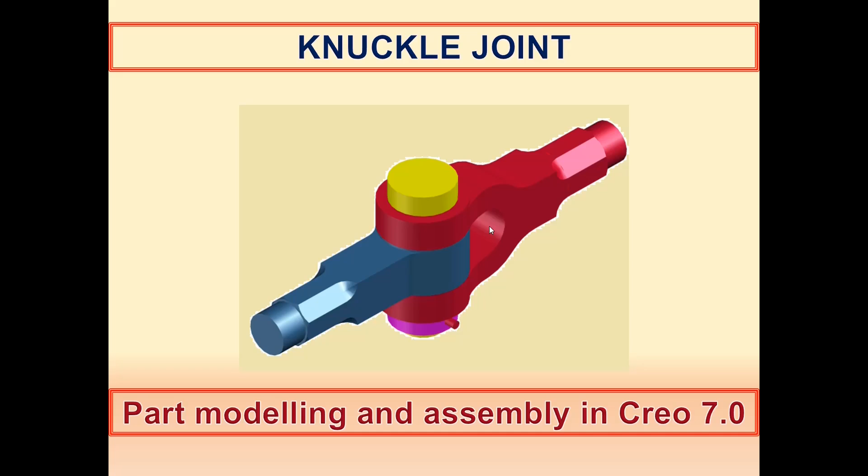Hello friends, in this video I am going to explain the part modeling and assembly of a knuckle joint using Creo 7.0. Now let's see the construction of a knuckle joint.

In a knuckle joint, one end of the rods is converted into a fork end with double eyes and the other end is converted into an eye end with single eye. The eye end of the rod is inserted into the fork end and a cylindrical pin will be introduced through the aligned holes. The cylindrical pin is held in its position with the help of a collar and a taper pin. Here we can see the exploded view of a knuckle joint.

We need to assemble all the 5 parts together to get the assembly of a knuckle joint. We all know that cotter joints are used for connecting two rods with perfect axial alignment, and a cotter joint does not permit any relative angular play between the two rods. But a knuckle joint can be used for connecting two rods having intersecting axes, and we can use a knuckle joint while converting a reciprocating motion into rotary motion and vice versa.

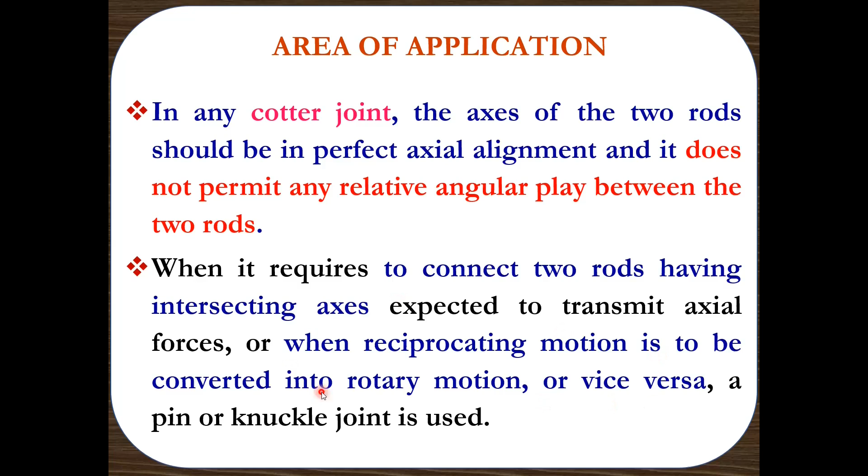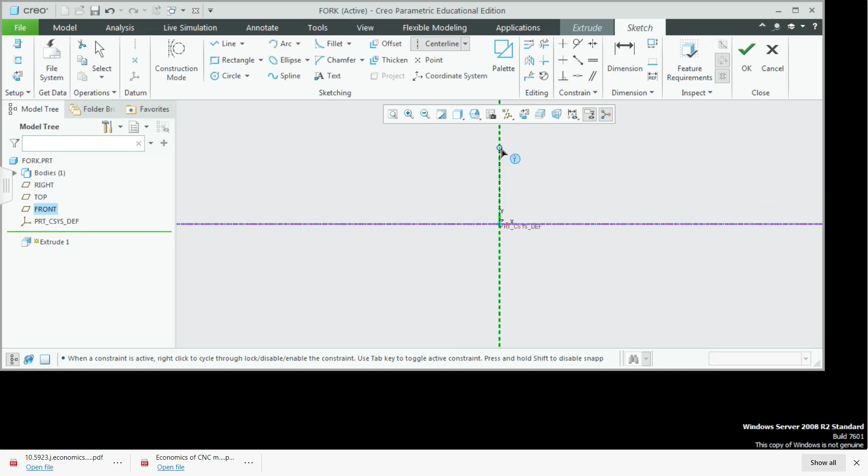Select millimeter Newton second part solid absolute. Give OK. Select extrude option. Select the front plane. Select the sketch view. Now we shall draw the center lines. We shall start with the arc of radius R18. So instead of drawing the arc, let's draw a circle of radius 18. So go to circle command, select center and point, draw a circle. Next we need to draw the arc of radius 36. We shall draw that arc as a circle.

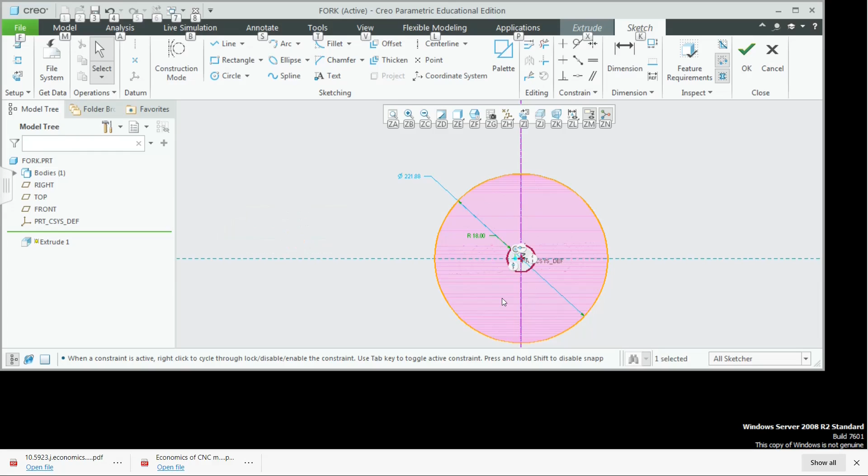Now we shall change the dimensions of the concentric circles. The inner radius is 18. First we shall change the diameter option into a radius option. It is 18 mm radius, enter. And the outer circle radius is 36. We shall change this diameter symbol into radius symbol by left clicking and selecting the radius option. Change the dimension into 36. Go to refit. Now we have completed the concentric circles with radius 18 and 36.

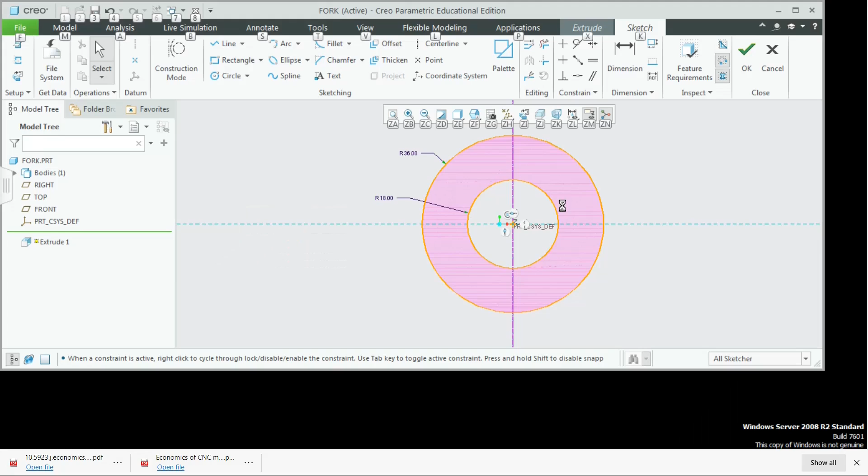Now we have to extend this portion as a square end with dimension 36 by 36. So go to rectangle, select corner rectangle. Okay, now we have to change the dimension. The thickness of the square end is 36. So we can change it as 36. The distance between the center of the arc and the end of the octagonal end is 109 mm. But now we need not consider the 45 mm octagonal end.

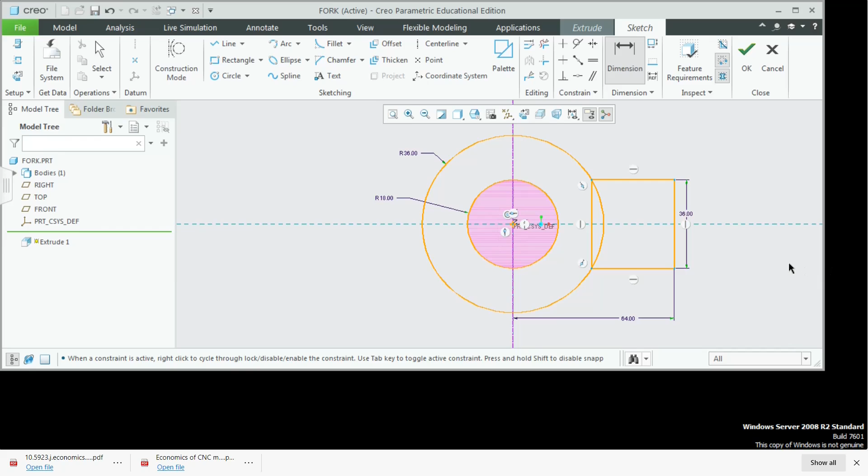Now we shall dimension the distance between the vertical center line and the starting part of the octagonal end. We all know that the distance given is 109, but now we need not consider the 45 mm. So this length will be 109 minus 45. Enter. So it is 64. Now we shall trim the unwanted portion with the help of delete segment.

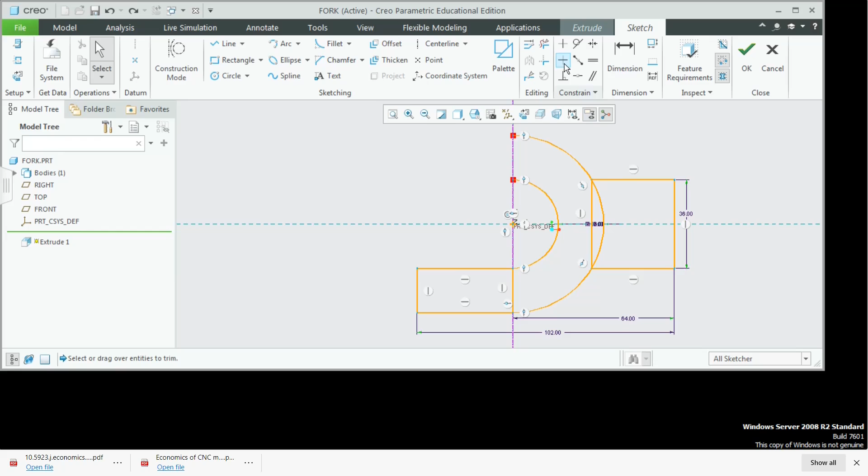Let me draw a rectangle using the corner rectangle option. Select. Click. Now let's dimension this portion, that is from this left end to the starting part of the octagonal end. Since we are not considering this 45 mm portion now, we shall take this dimension as 147 minus 45. Enter. So this length is 102 mm. We shall also remove the unwanted region using delete segment option.

Now let's mirror the lower part with respect to the horizontal center line. Select the lower part, go to mirror command, mirror it with respect to the horizontal center line. From this diagram we can see that the inner radius of the arc is 18 mm and the outer radius of the arc is 36, and the length between the center of the arc to the start end of the octagonal end is 64, and the distance between the end of the rectangular portion to the start end of the octagonal end is 102 mm.

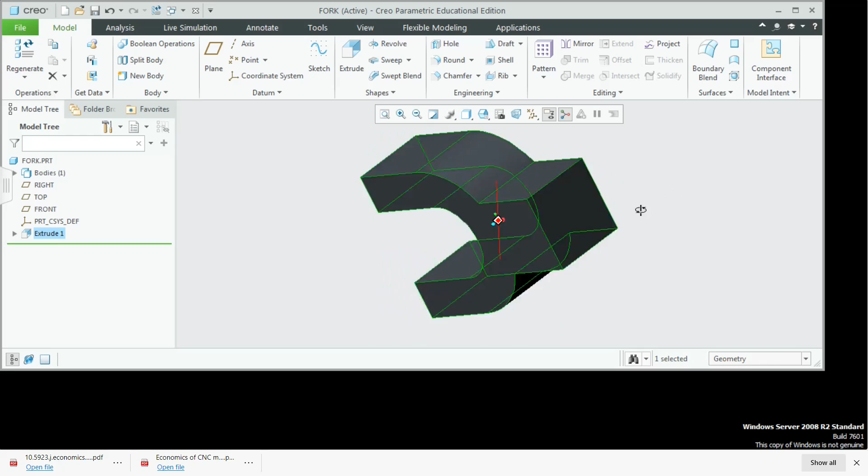Give OK. Now let's slightly tilt it. The total thickness of extrusion is 36 mm. So let's change it to 36, and we need to select the extrude symmetrically on both sides. Give OK. Now we have partially completed the fork end. Select the standard orientation. Now we need to draw the double eyes. Let's go for the next extrude command. Select the top surface. Go to sketch view. Include references.

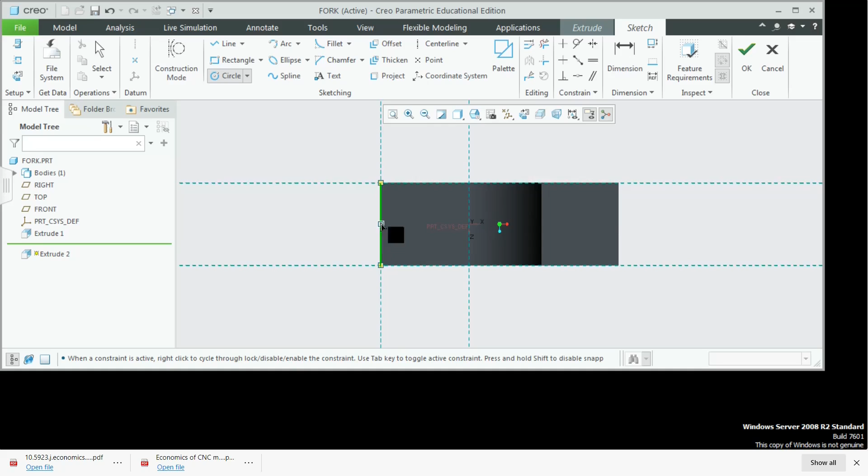Close it. Now we have to draw the two concentric circles on the lower end. The inner circle is of diameter 30 and the outer circle is of diameter 60. Go to circle command, select the center and point option, draw the inner circle and draw the outer circle concentric with the inner circle. Now let's change the dimension.

We know that the inner circle diameter is 30 and the outer circle diameter is 60. Now we have drawn the concentric circles on the upper surface of the lower arm of the fork. Now let's give OK. We need to extrude in the downward direction. Change the direction, and the height of extrusion is 22. So change it into 22.

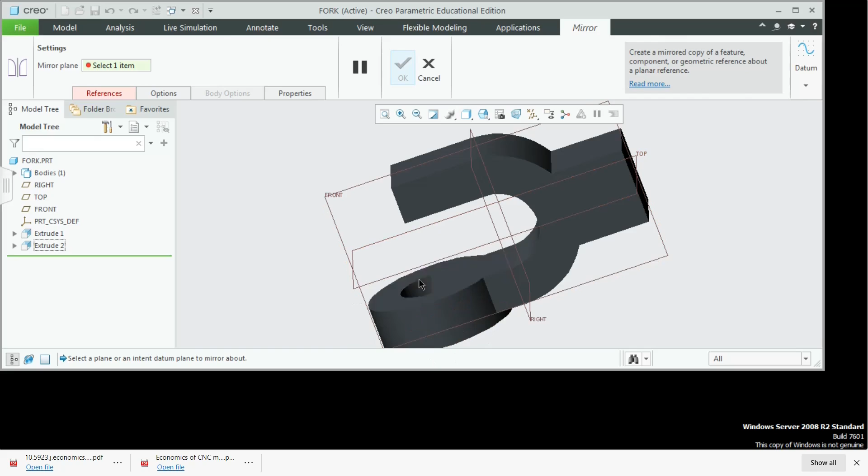Give OK. Now go to view option. Switch on the reference planes. Now let's select the eye end. Go to mirror. We shall mirror this eye portion with respect to the middle plane. Select the middle plane. Now we have created the eye portion on the upper arm of the fork. Give OK. Go to standard orientation.

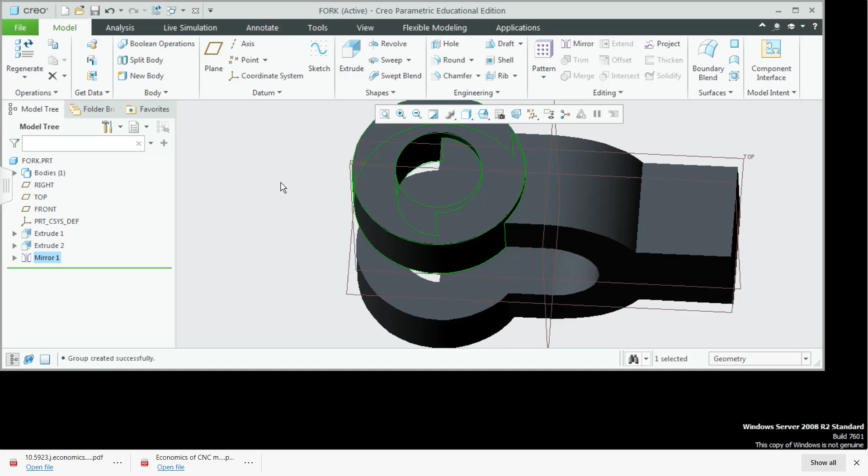Now we have to remove the extra materials which are inside the eye portion. So select the extrude option. Select the top surface. Go to sketch view. Select the references. Give close. Now select the circle with center and point. Draw a circle with the same center. We have drawn a circle at the top end of the eye.

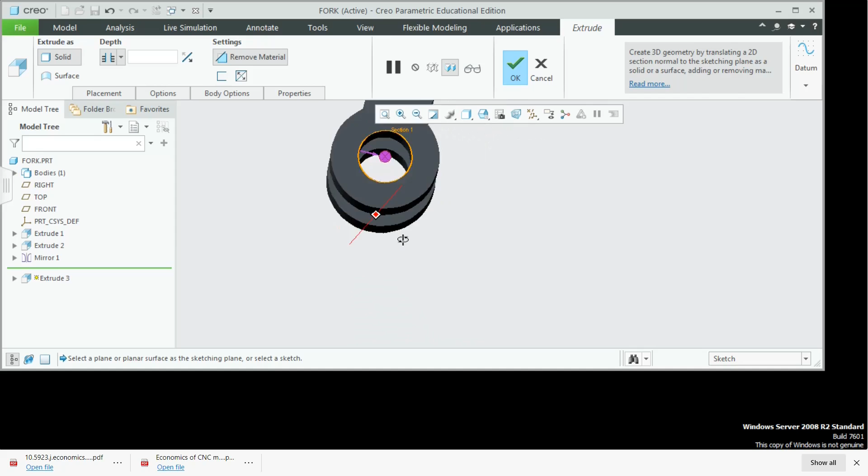Give OK. Change the direction. Let's select the extrude to intersect with all surfaces. Remove material. Now we have removed the extra material which was inside both the eyes. Select the standard orientation. Now we have to extend the square end as an octagonal end of length 45 mm.

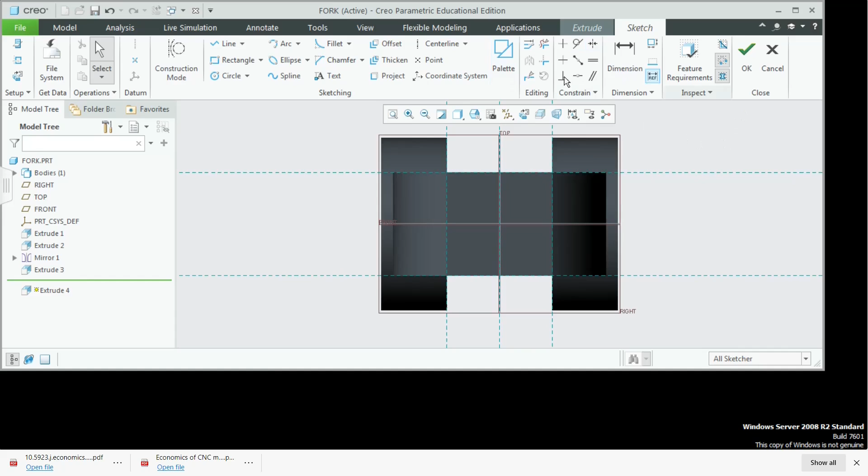So select the extrude option, select the end plane, go to sketch view, insert references, give close, go to sketch, go to palette option, select the polygons, select the 8-sided octagon, click and drag it and place it somewhere like this. Close it.

Now we have to place this octagon at the center of the square end. So let's constrain it. Select the coincident. Select the center point. Click on the vertical center line. Now we have aligned the center of the octagon on the vertical center line. Once again select the coincident option. Select the center of the octagon. Click on the horizontal center line. Now we have relocated the center of the octagon at the center of the square.

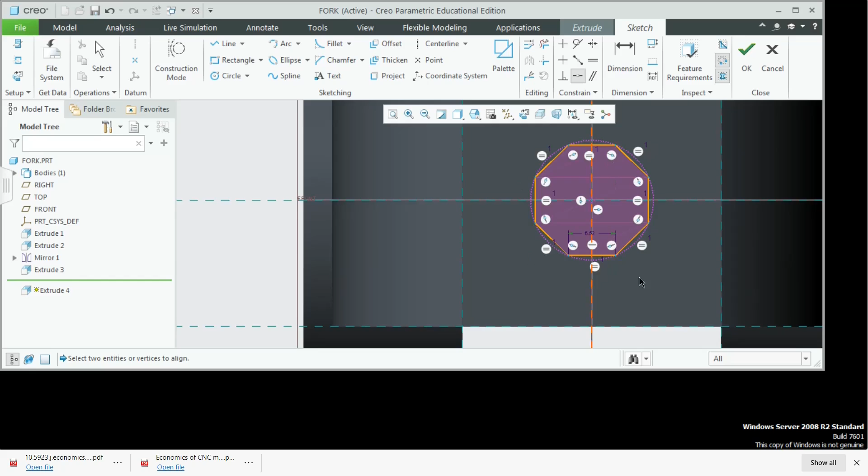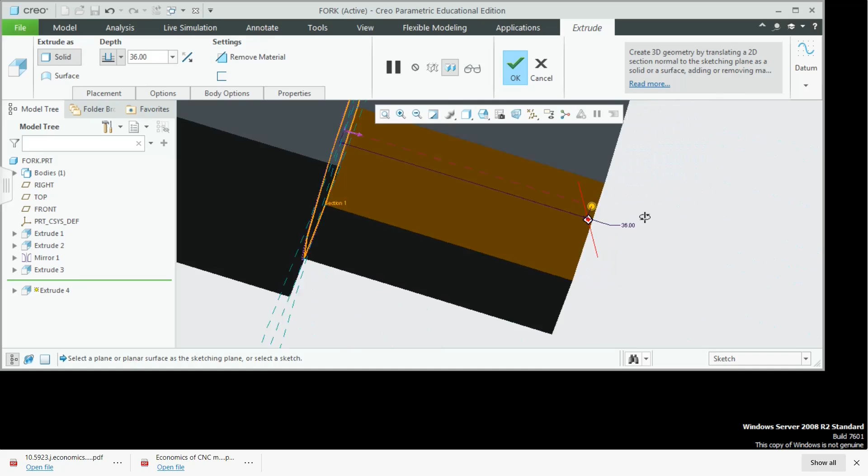Once again select the constraint option. Select one of the horizontal edges of the octagon. Select the horizontal edge of the square. Delete. Now we have aligned one of the horizontal edges of the octagon with the horizontal edge of the square. Let's give OK. Let's slightly rotate it. We know that the length of extrusion is 45 for the octagonal end. Give OK. Now we have extended the square end as an octagonal end.

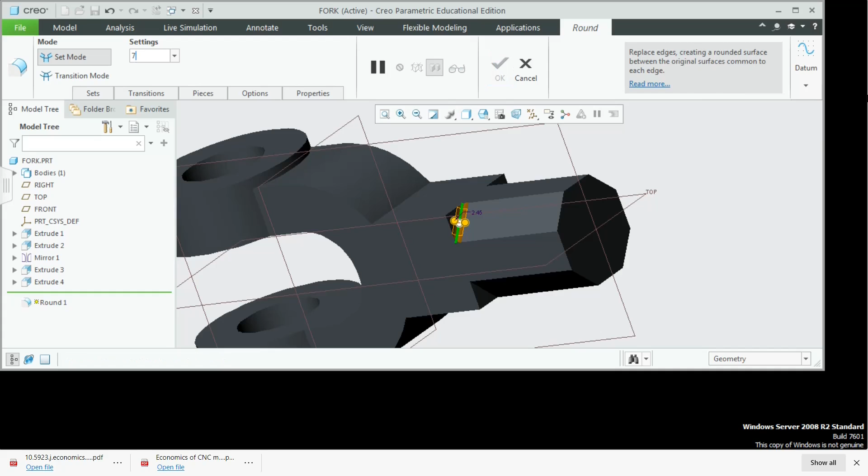Now we have to insert a fillet on this particular edge. Go to round option. Select this edge. Okay, let's randomly give a radius of 7. It is exactly matching. Give OK. In the same way, we shall insert the fillet on the other inclined edges.

Select the round option. Select this particular edge. Give OK. Now rotate it. Select the edge. Give OK. Once again select the round option. Select the inclined edge. Give OK. Now we have filleted all the 4 edges.

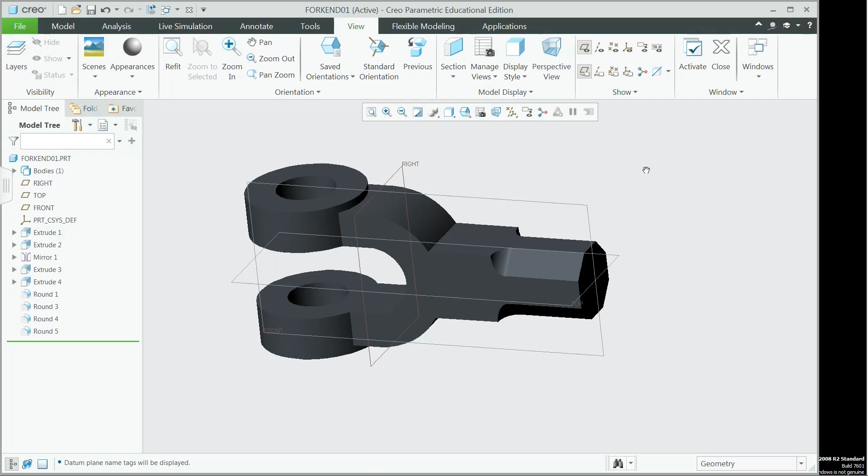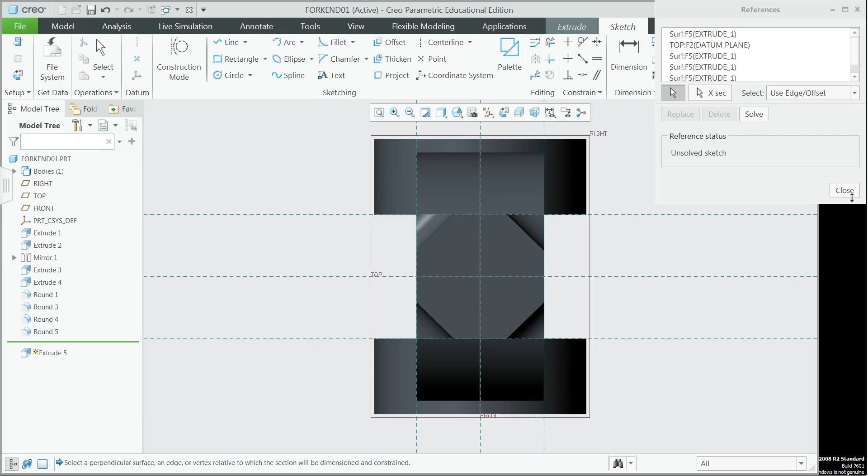Now the octagonal end needs to be extruded further as a cylindrical rod of diameter 30 mm. So go to model, select extrude, select the plane of extrusion, select the sketch view, select the references, give close, go to circle, select the center and point option, select the center of the octagon, draw a circle. The diameter of the circle is given as 30 mm. Change the diameter of the circle as 30. Enter.

We have to extend the circle as a cylinder. Give OK. And let's assume the length of the cylinder as 25 mm. The value is not given. Give OK. Select the standard orientation.

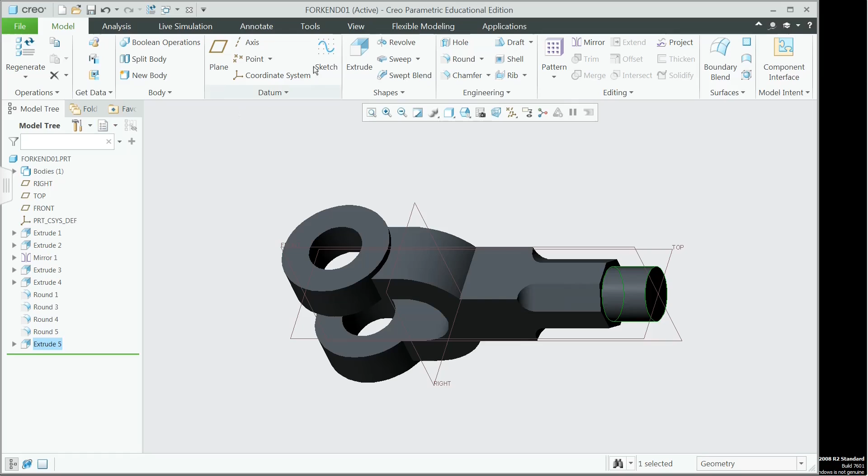Now let's change the color of the fork end. Go to view option. Select appearance. Select the red color. Select the part option. Click on the part. Now we have changed the color of the part into red. Save this file as fork. Give OK. Now we have completed the modeling of the fork end.

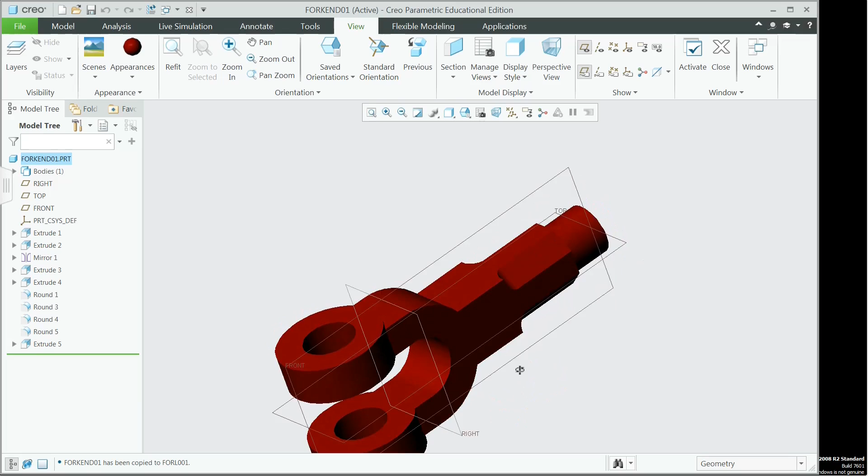Go to a new file, part, change the part name as eye. Remove the tick mark on use default template. Give OK. Select millimeter Newton second part solid absolute. Give OK. Now we shall draw the part.

Go to the extrude option. Select the front plane. Go to sketch view. Draw the center lines. We shall draw the eye end from the center of the eye. Go to rectangle.

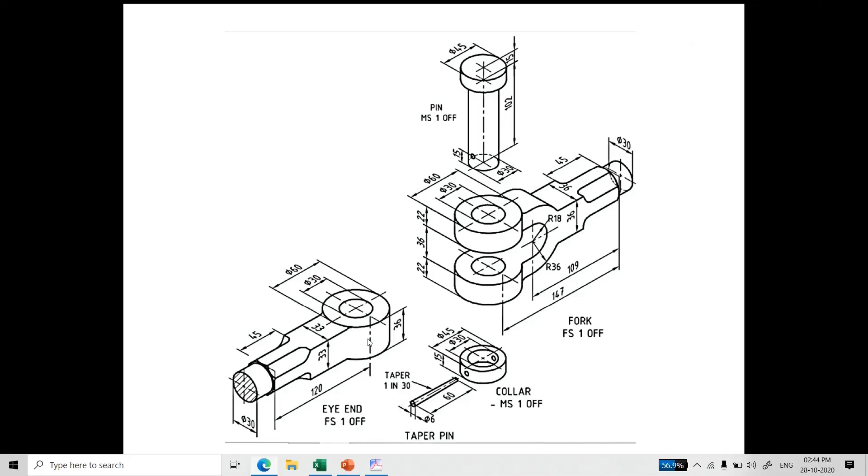We know that the length of the rectangle is 75, that is 120 minus 45, which equals 75. And the thickness of the square end is 33.

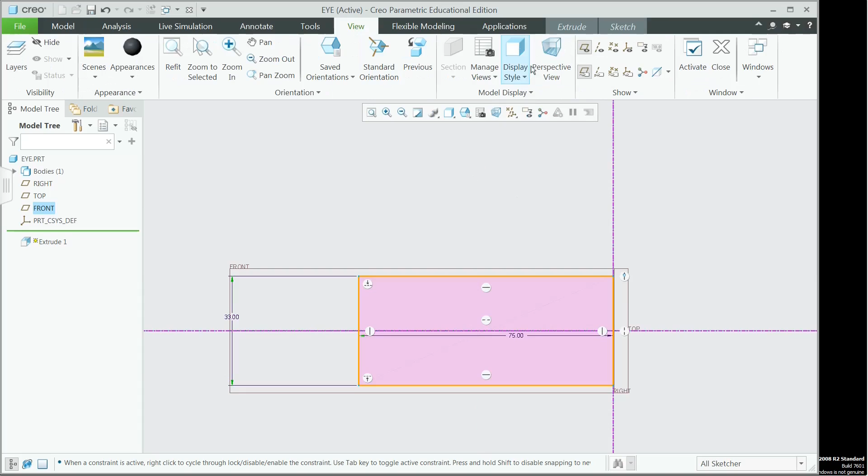33. Let's switch off the reference planes. Give OK. Select the extrude symmetrical option and the thickness of the extrusion is 33. Give OK.

Select the standard orientation. Let's go to view option, switch on the reference planes. Now we have to model the eye portion of the eye end.

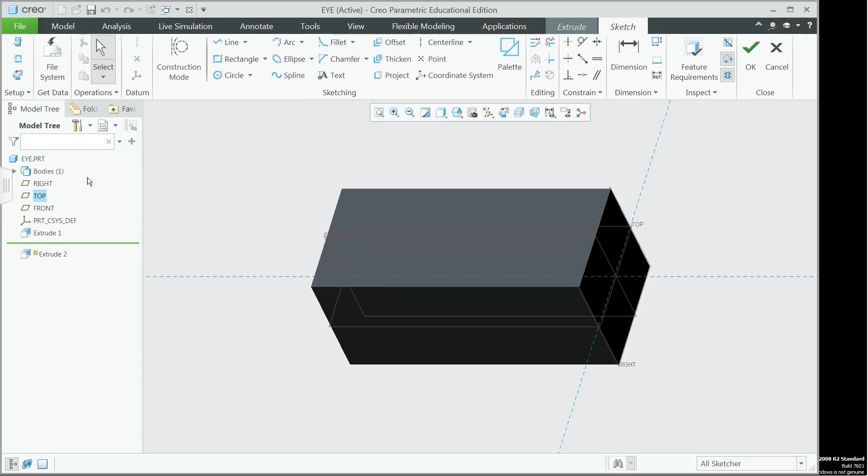So go to model, extrude, select the middle plane as the reference plane. Go to sketch view, include the reference lines, close it. Now we need to draw the eye with inner diameter of 30 and outer diameter of 60.

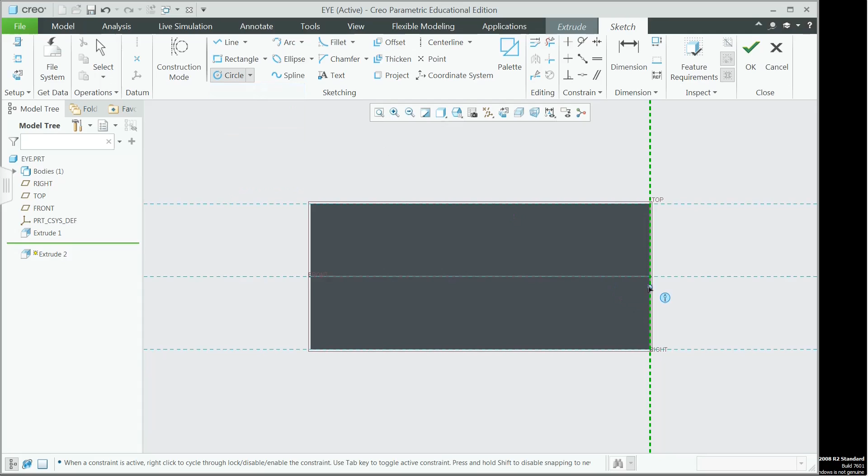So go to circle, select center and point, select the center of the first circle, then draw the second circle, which is a concentric circle. Now we need to change the diameter. The diameter of the inner circle is 30. The diameter of the outer circle is 60.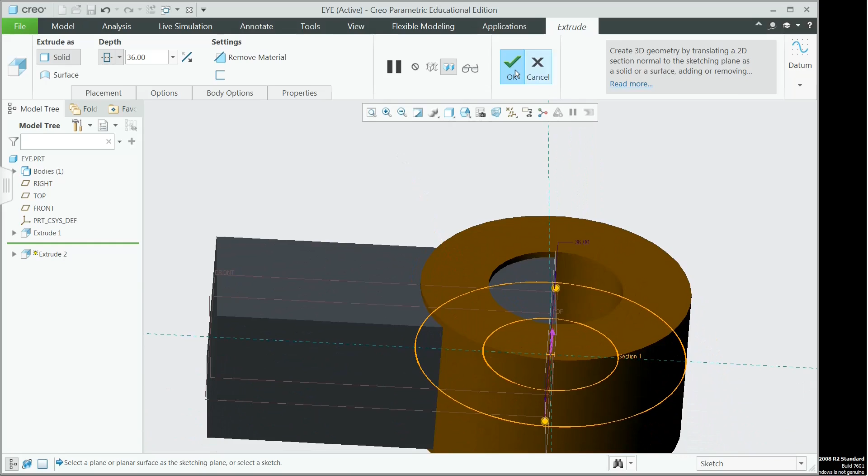Now we need to extrude this eye portion for a thickness of 36. So give OK. Select symmetrical about center axis. The depth of extrusion is 36. Give OK. Now we need to remove the extra material which is inside the eye.

Once again go to extrude option. Select the plane of extrusion. Go to sketch view. Select the references. Select the inner circle. Give close. Now go to circle command. Select center and point. Draw a circle of diameter 30. Give OK.

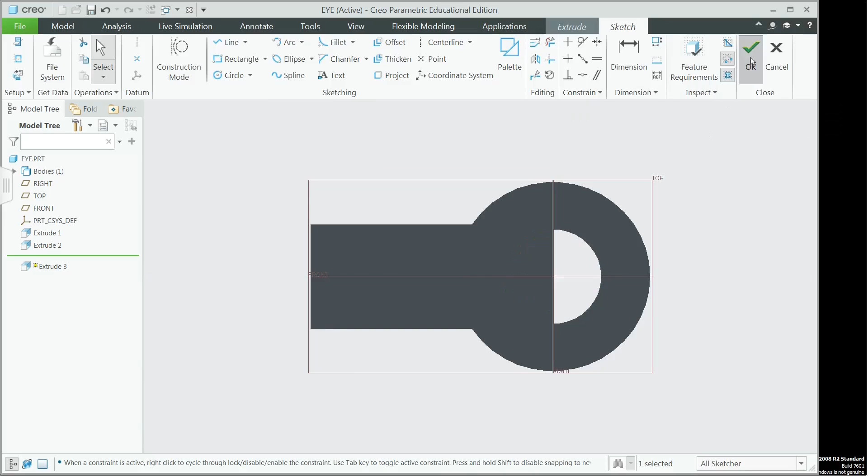We need to change the direction of extrusion. Select the option extrude to intersect with all surfaces. Remove material. Give OK. Now we have to include the octagonal part of the eye end.

So go to extrude once again. Select the surface. Go to sketch view. Select the edges of the square as references. Close it. Now go to palette option.

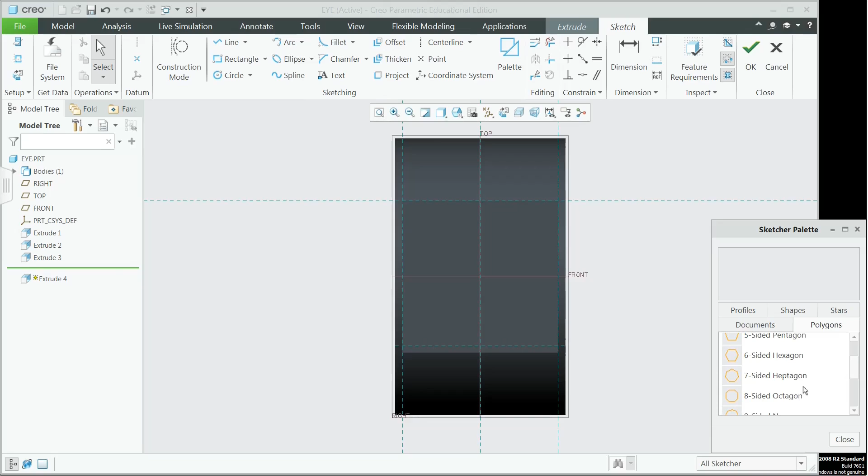Select the polygons. Select the 8-sided octagon. Click and drag it. Close this window. Now we have to move the center of the octagon to the center of the square.

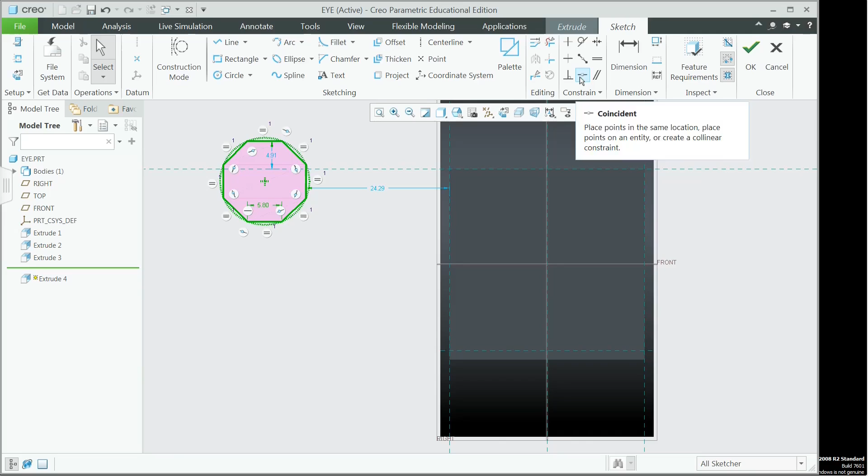So we need to apply the constraint. Select the coincident constraint. Select the center of the octagon. Select the vertical reference line. Now we have aligned the center of the octagon on the vertical axis.

Once again select the coincident option. Click on the center. Click on the horizontal reference. Now the center of the octagon is aligned with the center of the square rod.

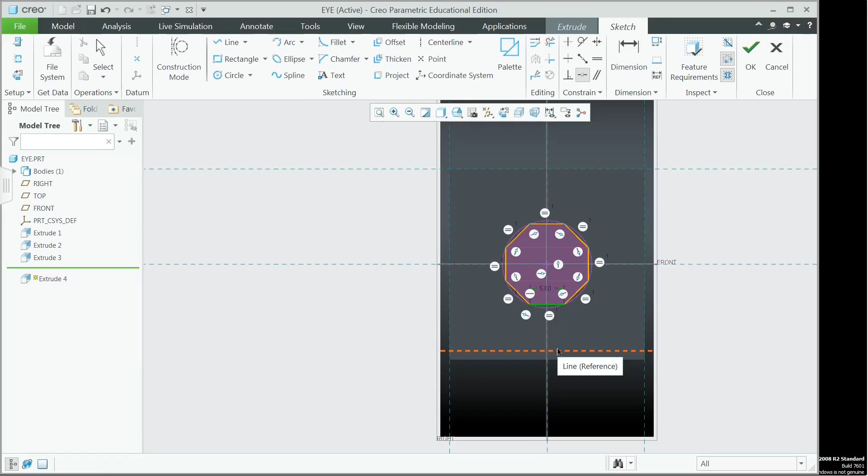Now we have to change the dimension of the octagonal end. Once again apply the coincident constraint. Select the horizontal edge of the octagon. Select the lower end of the square. Click delete. Now both the edges are made coincident to each other.

Give OK. Tilt it. We need to extrude the octagonal end for a depth of 45. Give 45. Click OK. Now we need to include the circular end of diameter 30 mm on the octagonal end.

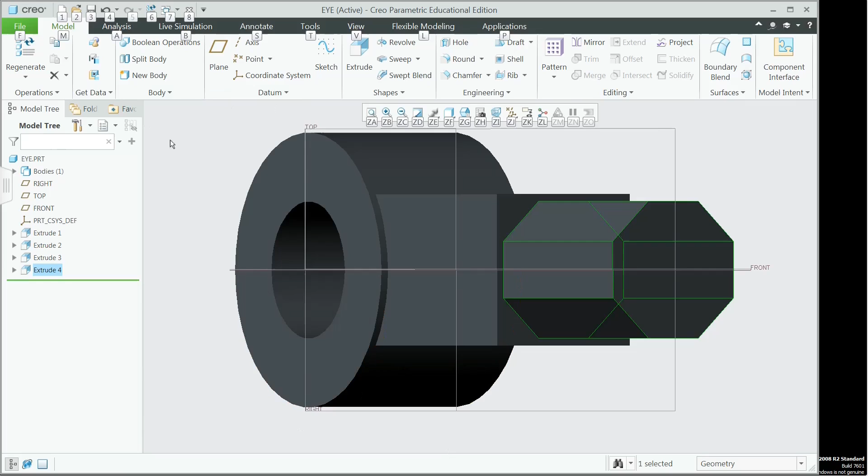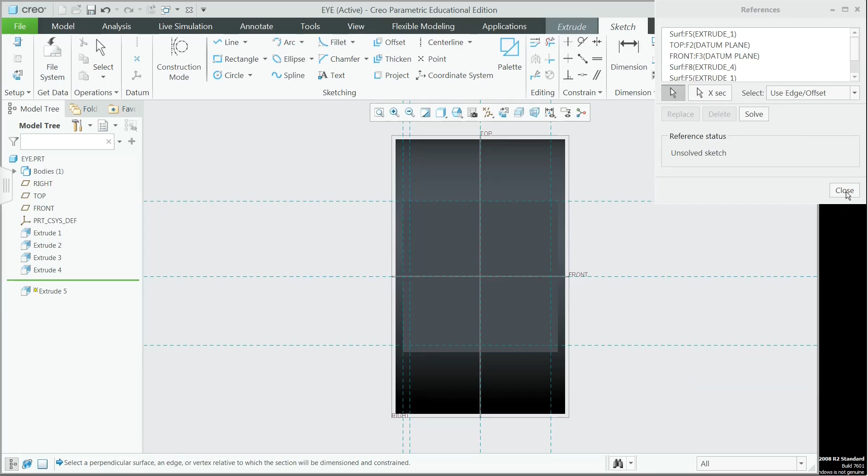Once again select the extrude option. Select the plane of extrusion. Go to sketch view. Select references. Draw the reference lines. Close it. Go to circle command.

Select center and point. Go to the center of the octagon. Change the diameter of the circle as 30. Enter. Now we can extrude it.

The length of extrusion is not given. Let's assume the length of extrusion as 25 mm. Give OK. Select the standard orientation.

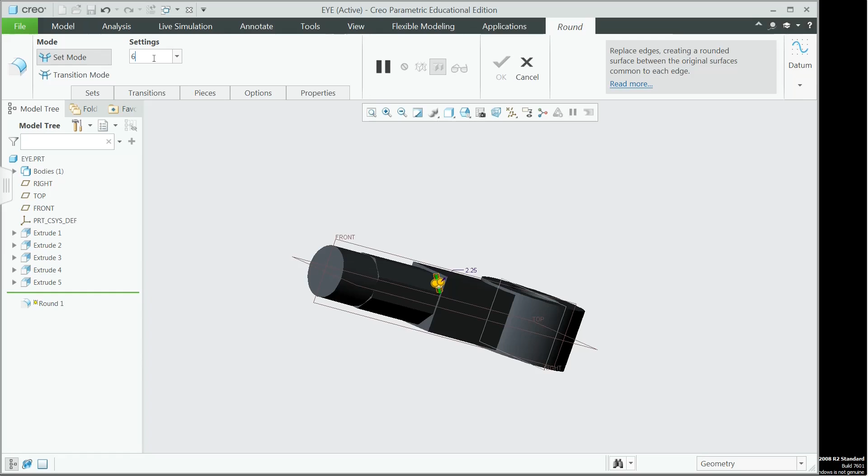Now we have to include the fillet on this particular edge. So go to round option. Select the fillet. Okay, we can change the fillet radius as 6 mm approximately. Give OK.

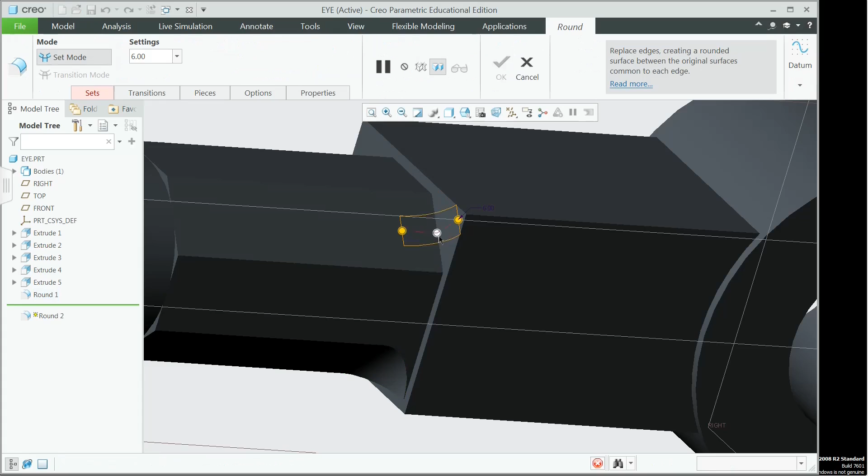In the same way, we shall include the fillet on the other inclined edges. Go to round, select the edge, give OK. Go to the third inclined edge, select the round option, select the edge, give OK. Go to the fourth inclined edge, select the round option, select the edge, give OK. Go to standard orientation.

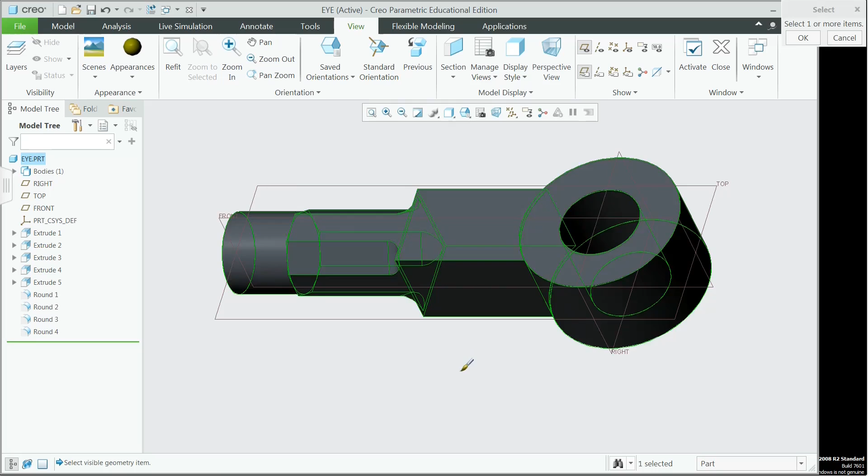Now we shall change the color of this eye end. Go to view, select appearances. We shall select a light color. Select the part, then click on the part. Now we have changed the color of the eye end.

Now let's model the third component in this knuckle joint assembly. So we need to draw the head portion of diameter 45 with a thickness of 15 mm. Then we need to further extend it 102 mm with a diameter of 30.

Let's start a new file. Change the file name as pin. Remove tick mark on use default template. Give OK.

Select millimeter Newton second part solid absolute. Give OK. Select the top plane as the reference plane. Select the extrude option.

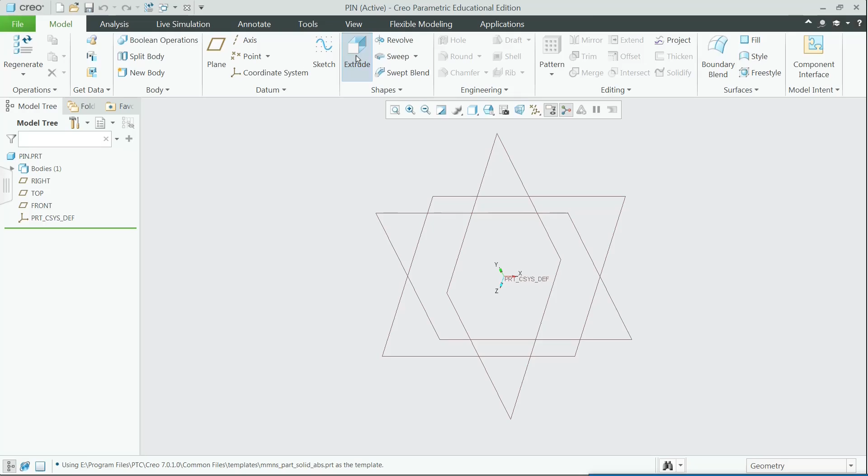Select the sketch view. Draw the center lines. Now let's start from the head portion of the pin.

Go to circle. Select center and point. Draw the circle. Change the diameter to 45.

Refit. We need to extrude the circle for a depth of 15. Give OK. Let's change the direction of extrusion. Change the depth of extrusion as 15.

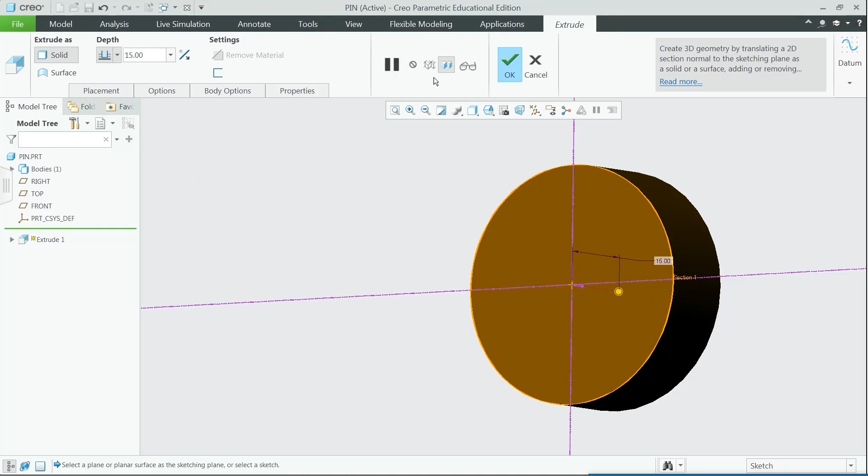Give OK. Once again go to view option. Switch on the reference planes. Go to standard orientation.

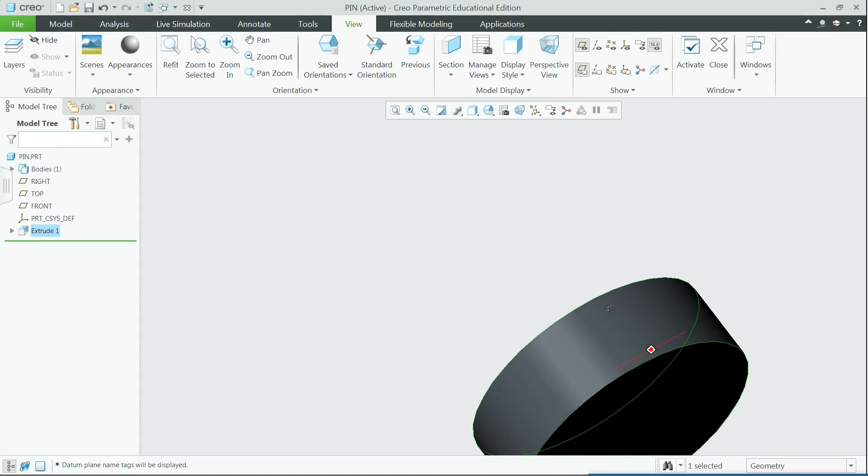Now let's extend this head portion as a cylindrical part of diameter 30 mm and a length of 102. So go to the bottom surface. Go to model. Select extrude.

Select the bottom plane. Select the sketch view. Go to circle. Select the center and point. Draw the circle. Change the diameter of the circle as 30 mm.

30 mm. Let me tilt it slightly. Give OK. We know the length of extrusion is 102. Give OK. Go to standard orientation.

Now we have to make a taper hole. Instead of making a taper hole, we can draw the taper pin and remove the material inside.

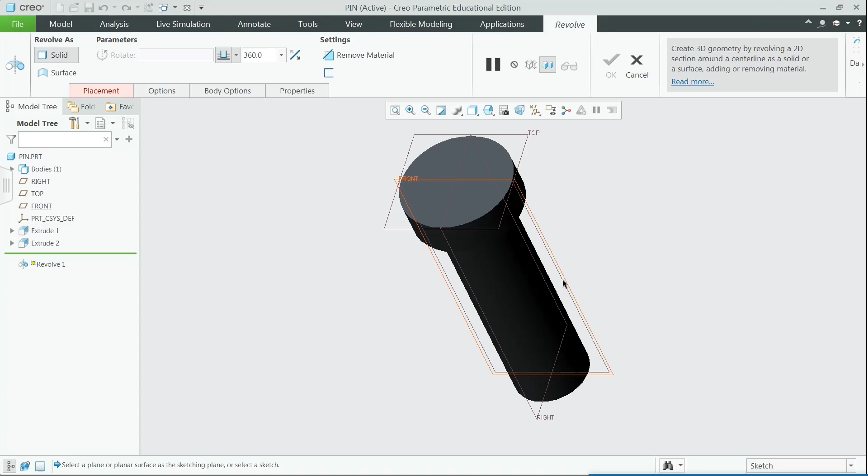Now let's select the revolve option. Select the front plane as the reference plane. Click on the sketch view. Include the reference.

Close. Draw a center line. The distance between the center of the taper hole to the bottom end is 15 mm. Change this distance as 15.

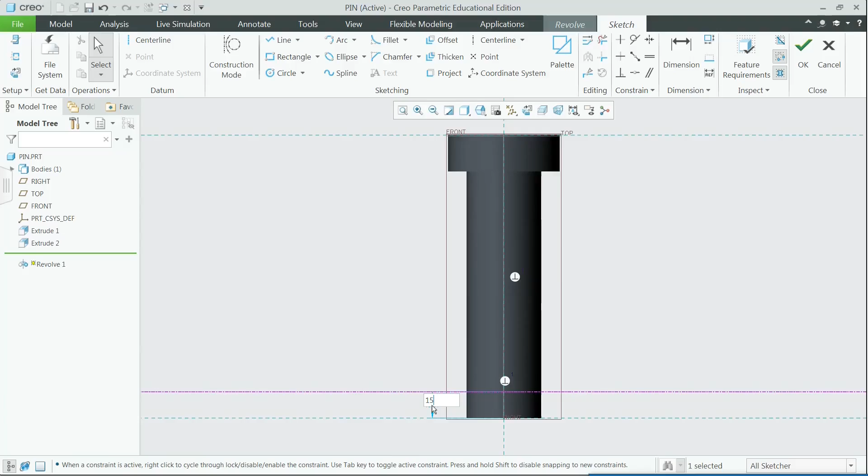Now we have to draw the taper pin instead of making a taper hole. Go to line command, select line chain.

We know the total length of the taper pin. Go to dimension. Click on the two boundaries of the taper pin.

It is given that taper is 1 in 30. The diameter of the larger end is 6. Automatically the diameter of the smaller end will be 4 mm.

Now we need to change the dimensions. Select all the dimensions. Go to modify. Remove the tick mark on regenerate.

The diameter of the smaller end is 4 mm, so this value will become 2 mm. And the diameter of the larger end is 6 mm, so this value will become 3 mm.

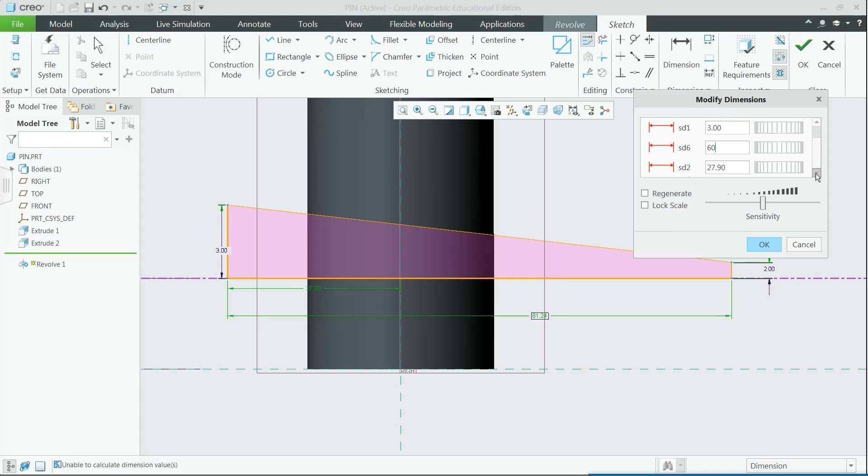We know the total length of the taper pin is 60. Half the value of this taper pin is 30 mm. Give OK. From this diagram we can understand the radius of the larger end is 3 mm and the radius

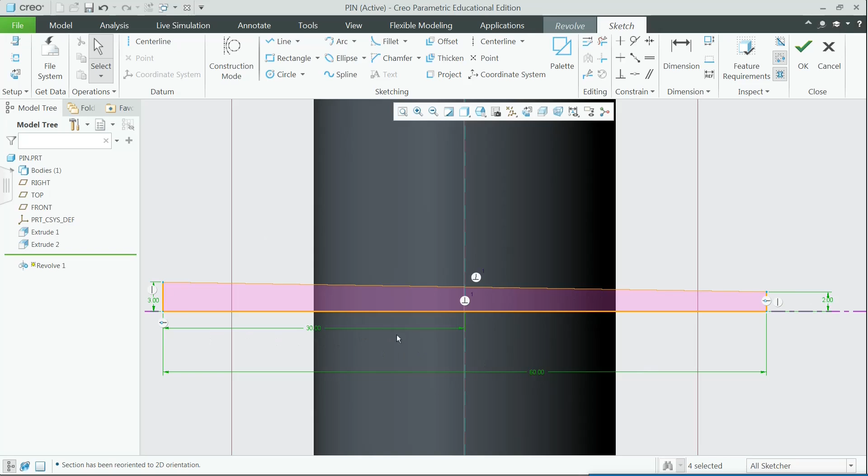of the smaller end is 2 mm. Total length of the taper pin is 60 mm and half the length of the taper pin is 30 mm. So let's give OK. Now we have created the taper pin.

So remove material, give OK. So now we have created the taper hole with taper 1 in 30.

Go to standard orientation. We shall also change the color of the pin. Go to view, change the color as yellow. Select the part option and click on the part.

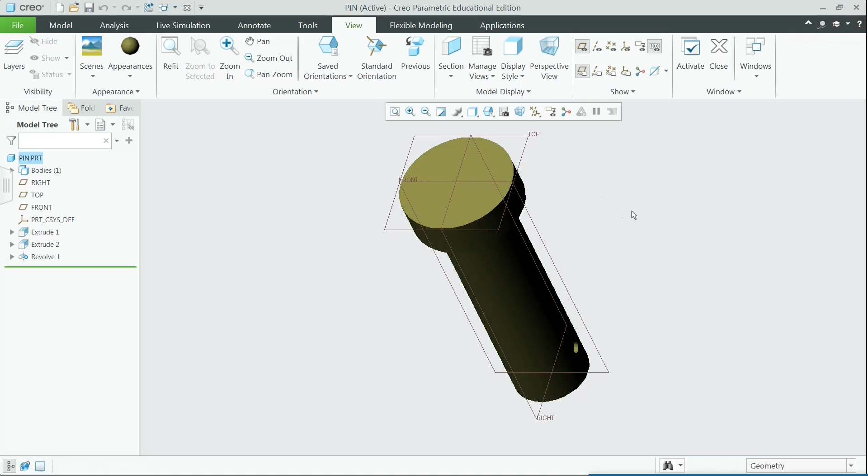Now we shall save the model. Give OK. Let's close this model.

Now we need to model the fourth part in this assembly, which is a collar. Open a new file, part, change the file name as collar, remove the tick mark, give OK.

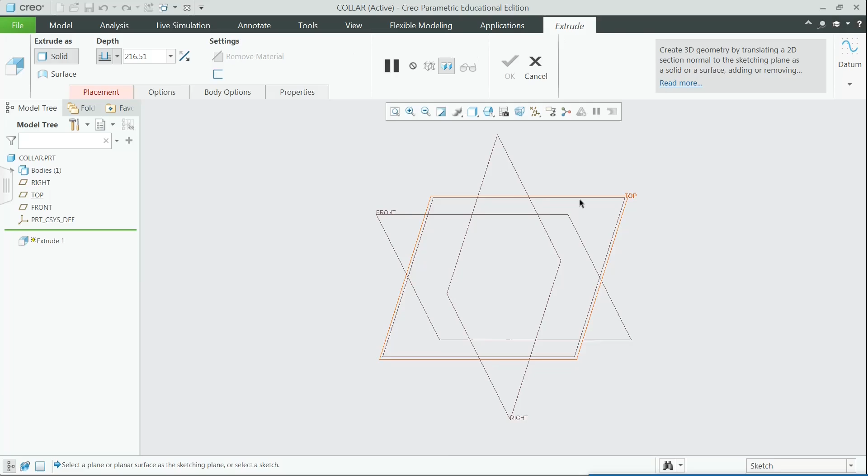Select millimeter Newton second part solid absolute, give OK. Select the extrude option, select the top plane, go to sketch view, go to view option, switch off the reference planes, go to sketch. Let's draw the center lines.

Go to circle, select the center and point, draw the first circle and draw the second circle. The diameter of the smaller circle is 30 and the diameter of the larger circle is 45.

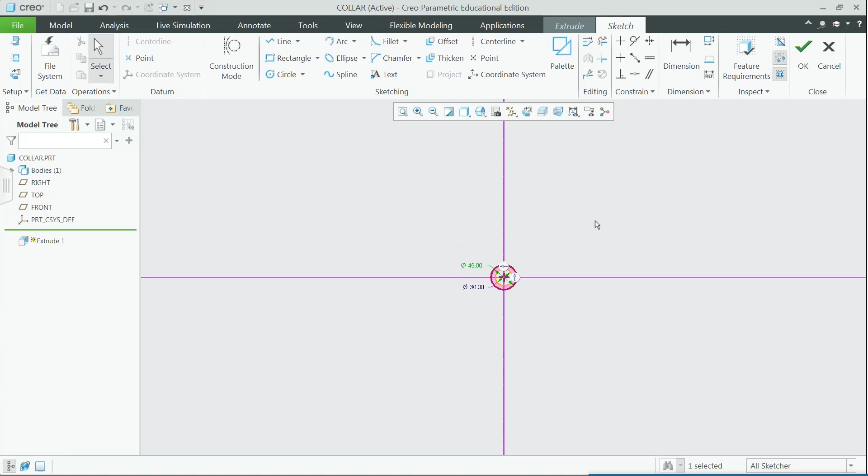We shall extrude the component symmetrical about the center plane, and the total depth of extrusion is 15 mm. Give OK. Go to view option, switch on the reference planes.

Now go to standard orientation.

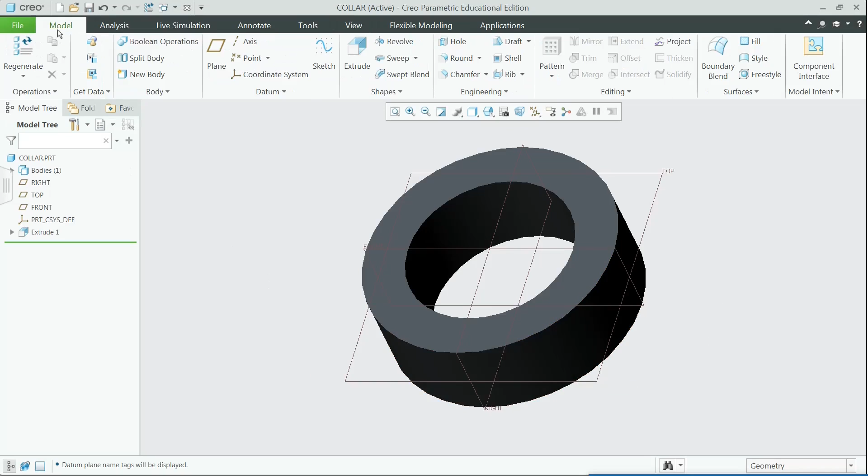We have to incorporate the taper hole on the collar also. So go to model, select the sketch option, select the front plane as the reference plane, select sketch, select the sketch view, include the references.

We close. Now we need to draw the taper pin of taper 1 in 30. Go to line, select line chain.

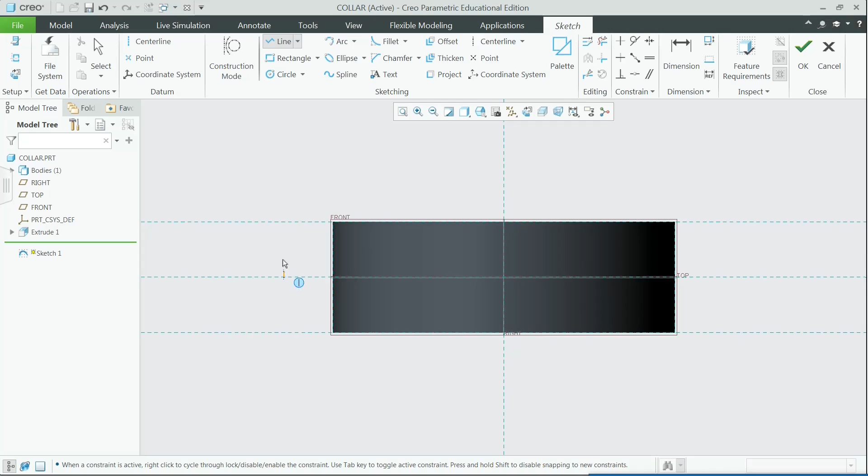We know the total length of this taper pin. Go to dimension, dimension the total length. We know the diameter of the larger end, the diameter of the smaller end. We know half the length of the taper pin also.

Now let's change the values as per the given dimensions. Total length of the pin is 60 mm. Half the length of the pin is 30 mm. Radius of the larger end is 3 mm. And the radius of the smaller end is 2 mm.

Now let's check the dimensions. Total length of the taper pin is 60. Half the length of the taper pin is 30. Larger diameter of the pin is 6. And smaller diameter of the pin is 4. Insert the center line.

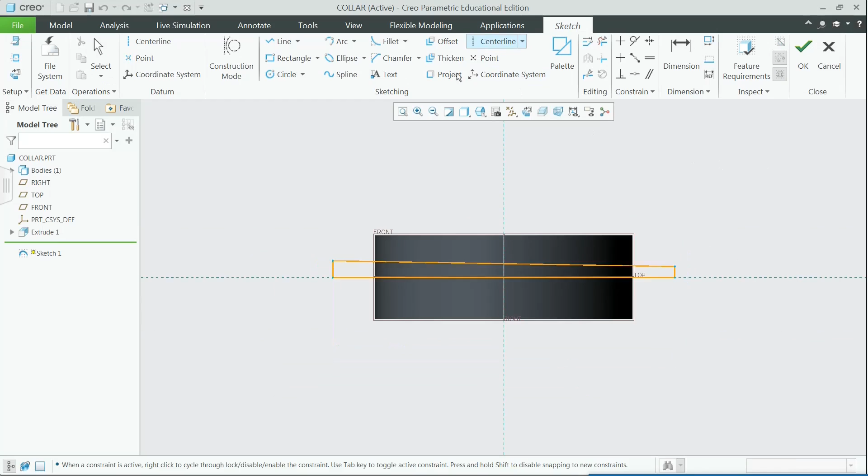Give OK. Select the revolve option. Now the pin has been created. We have to remove the material. Give OK. Now the taper hole is being created.

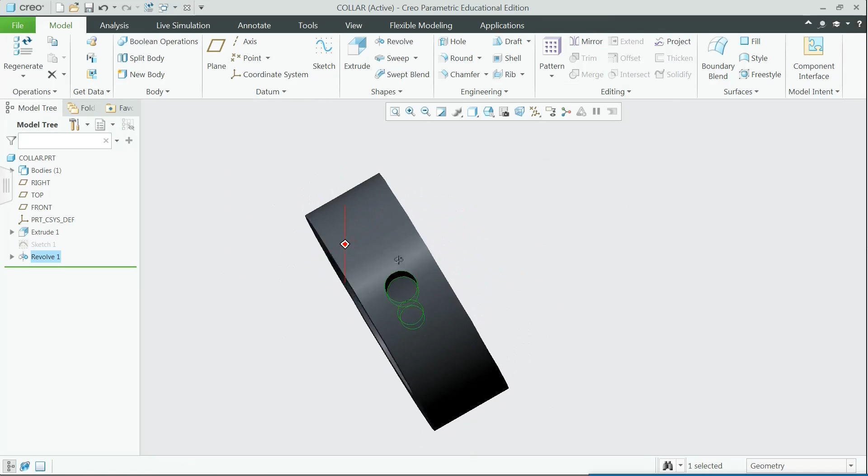Now let's change the color of this collar. Go to view, select appearances. Let me select the blue color. Select the part. Click on the part. Save a copy of this file. Give OK. Now let's close this file.

The last and final part is modeling of the taper pin. Let's open a new file. Part. It's a taper pin. Remove the tick mark on use default template. Give OK. Select millimeter Newton second part solid absolute.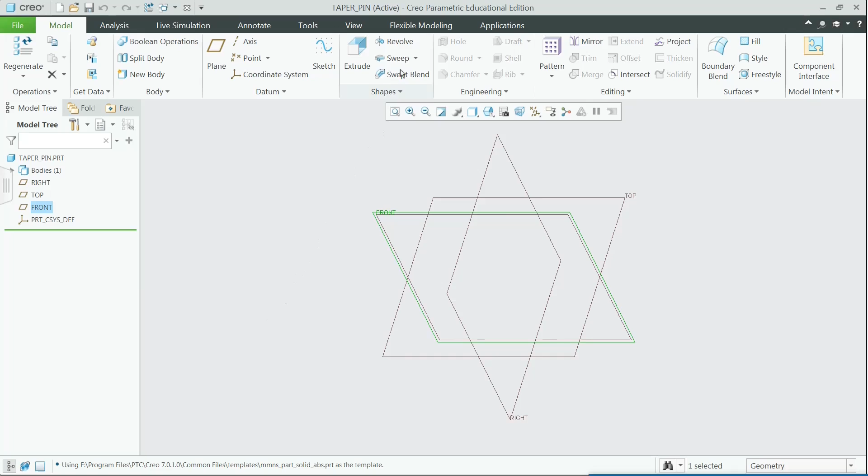Give OK. Now let's select the front plane. Select revolve. Select sketch view. Select view tab. Switch off the reference planes. Go to sketch option. Draw the center line. Now let's draw the taper pin. Go to line. Select the line chain. Draw the taper pin.

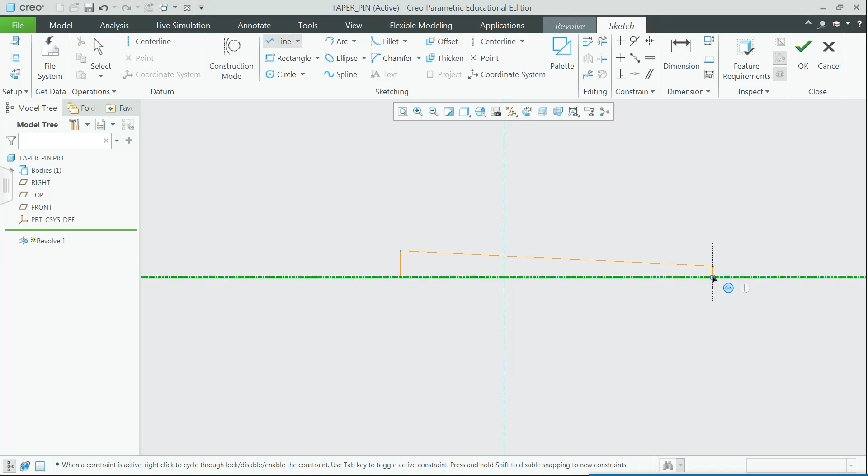We know the total length of the taper pin. Now let's change the dimension using modify dimensions. Select the sketch. Go to modify. Remove the tick mark on regenerate.

We know the total length of the taper pin is 60. Radius of the larger end is 3 mm. Radius of the smaller end is 2 mm. Half the length of the taper pin is 30 mm. Give OK.

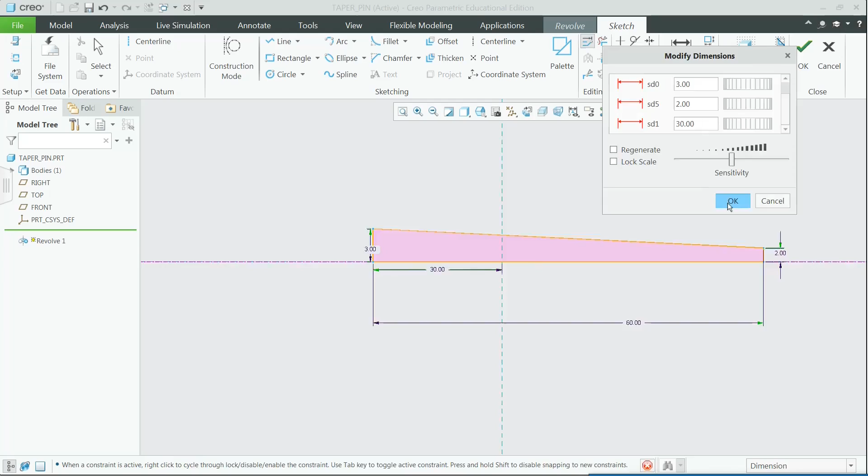Go to refit. Give OK. Now we have created the taper pin. Give OK. Go to view option. We can change the color of the pin. Let me select a brown color.

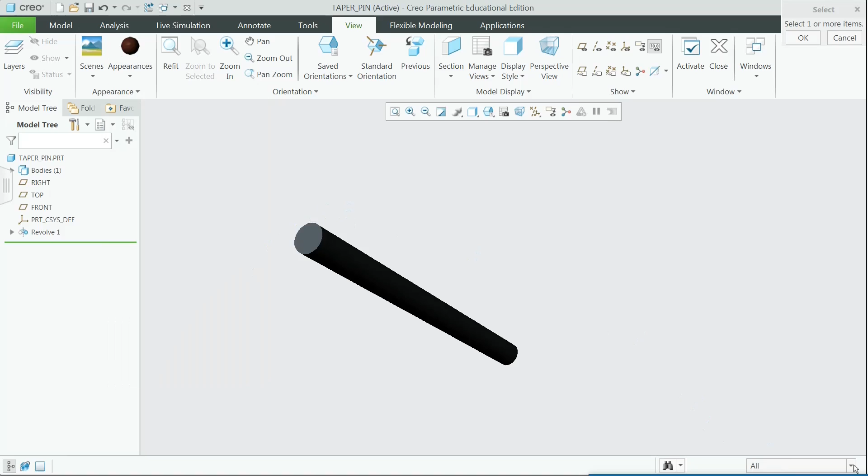Go to part. Click on the part. Go to file. Save a copy of this file. Give OK. Now we have completed the modeling of all the 5 parts. We need to assemble all the 5 parts together to get the assembly of a knuckle joint. Let's close this file.

Now let's open a new file. Select assembly. We can give the name as knuckle. Remove the tick mark. Give OK. Select millimeter Newton second assembly design absolute.

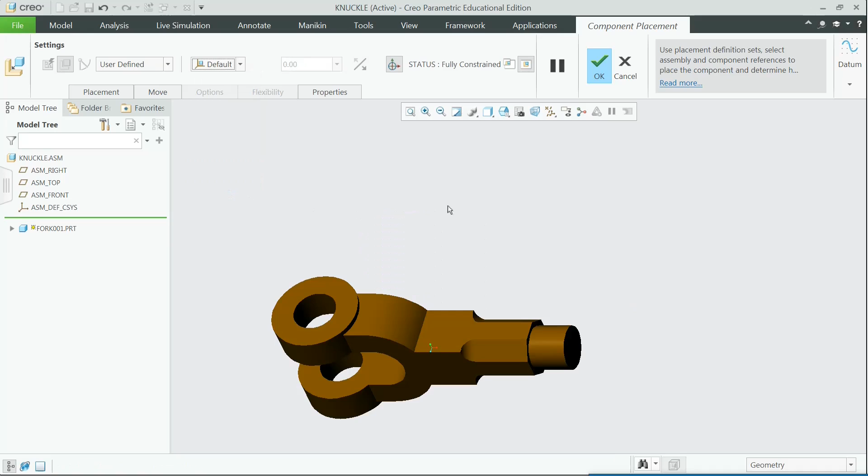Give OK. Now let's go to assemble. Select assemble. Select the first part of the assembly, that is fork. Give open. Change this part as a default part. Give OK. Go to view. Switch on the reference planes and reference axis. Go to assemble once again.

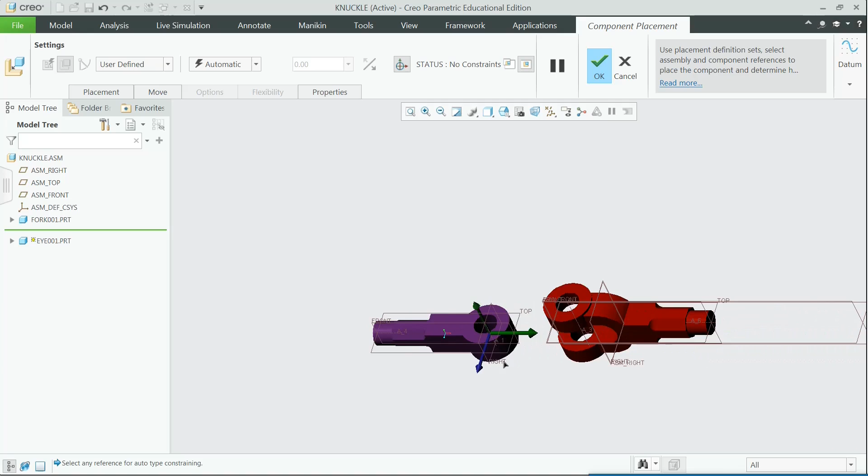Click on assemble. Select the eye end. Open it. Now let's move it. Select the vertical axis of the fork and the vertical axis of the eye. Make it at a distance of 0. Now slightly rotate it.

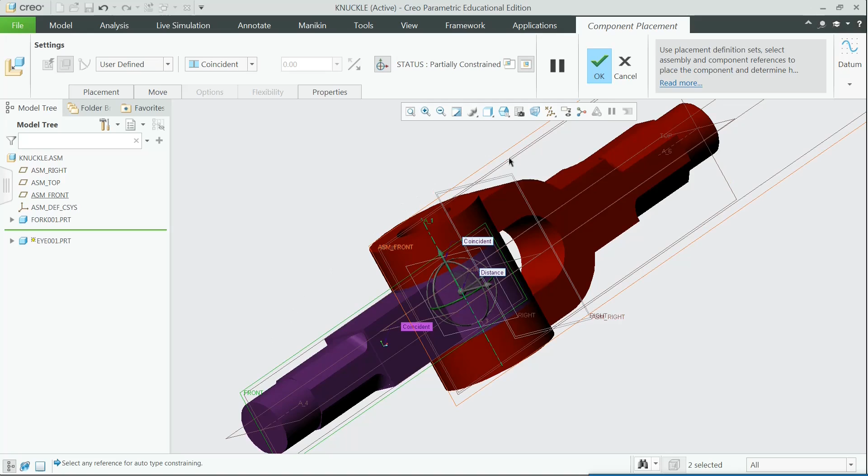Now select the top surface of the eye end and the bottom surface of the fork end to get coincident. Now we have to arrest the rotational movement. Select the front plane of the eye end to get coincided with the front plane of the assembly. Now it is fully constrained. Give OK.

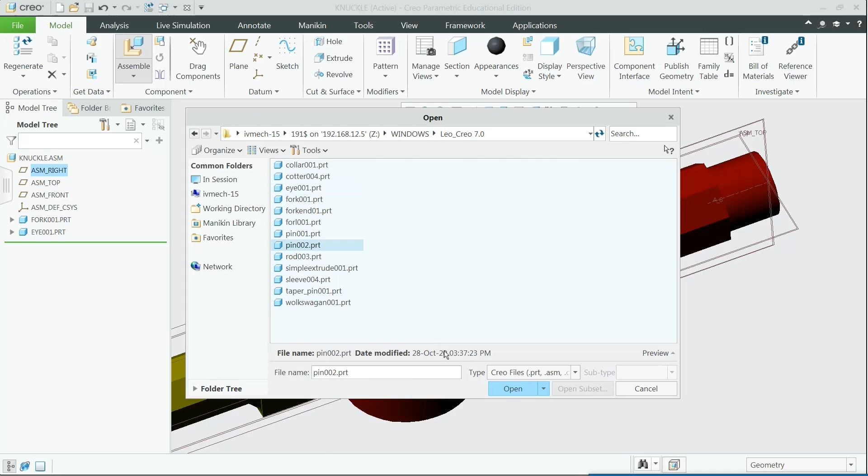Now let's assemble the third part of the assembly, that is the cylindrical pin. Go to assemble, select assemble, select the pin, open. Now let's coincide the central axis of the pin to get coincide with the central axis of the eye. We will make it coincident.

Now we have to make the top end of the fork to get coincided with the bottom end of the head. Okay, now it is fully constrained. Give OK. Now let's assemble the fourth part of the assembly.

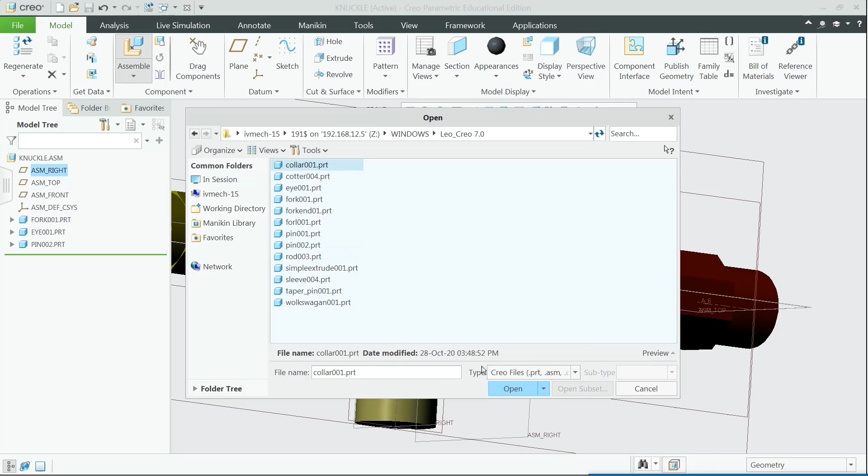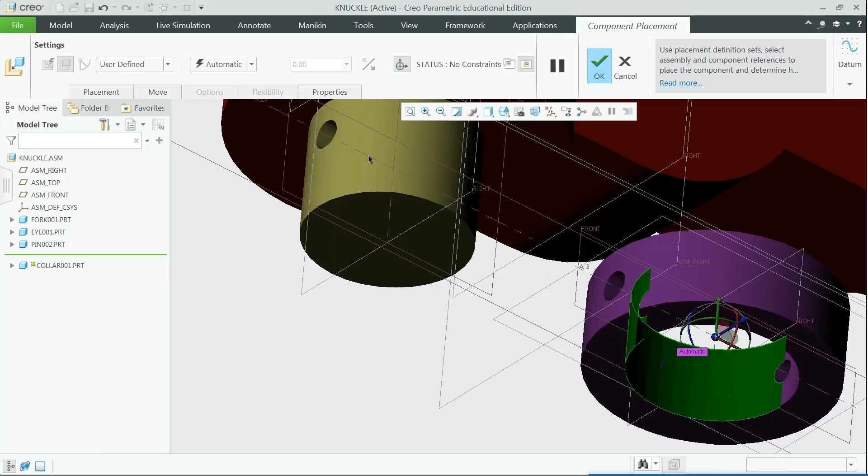Go to assemble, select the collar, give open, move it closer, slightly tilt it, make the inner surface of the collar and the outer surface of the pin to coincide, and the axis of

the hole in the pin and the axis of the hole in the collar should be oriented. Now both are aligned and assembled.

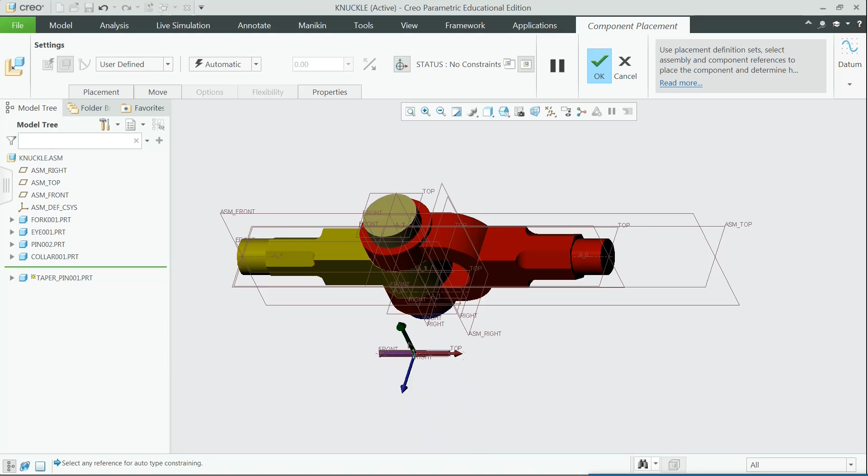Now we need to assemble the last part. Give OK. Go to assemble, select taper pin, give open, standard orientation, make it closer, make the axis of the hole and the axis of the taper pin coincident. Now we have to make the datum plane of the taper pin coincident with the

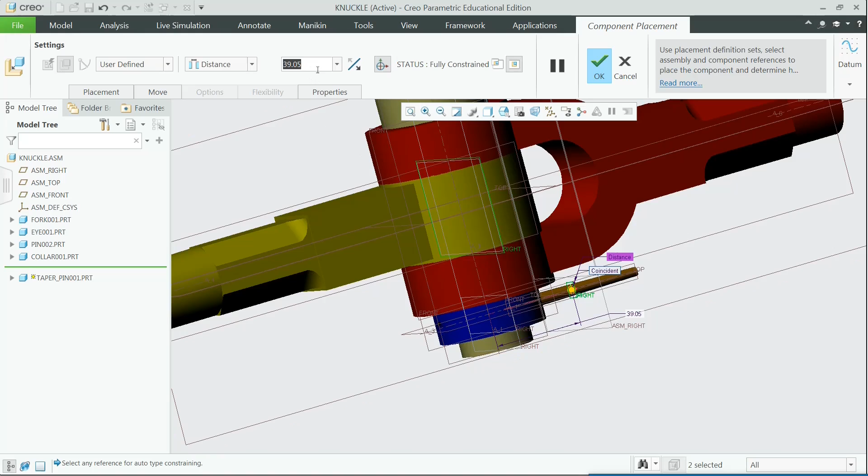right plane of the eye end. Make the distance 0. Now we have assembled all the parts together and it is fully constrained. Give OK. Go to view, switch off the reference planes.